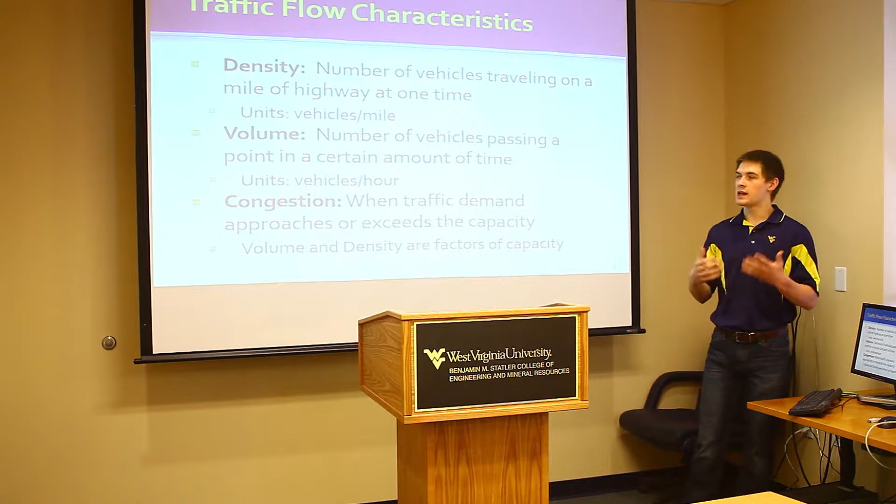And these two things are all because of the capacity. So what do you think controls the capacity? It is the volume and density, because a certain road can only hold a certain amount of vehicles per hour and per mile. So when that roadway starts to exceed or approach that capacity for the volume or density, that's when you're going to have a congested roadway.

So if you look at this picture right here, which lane do you think has the higher density and which lane do you think has the higher volume? So let's just assume that this lane over here on the left side is traveling near standstill speed, so not moving, and you can see that the cars are really close together. On this right side, the cars are traveling a lot faster and there's space between them.

So if we just took a snapshot of this picture, which one do you think has the higher density and the higher volume? So when we look at this, you can tell that this one has the higher density, because when we took our picture, you can count there's nearly 100 vehicles just in that one stretch of a mile.

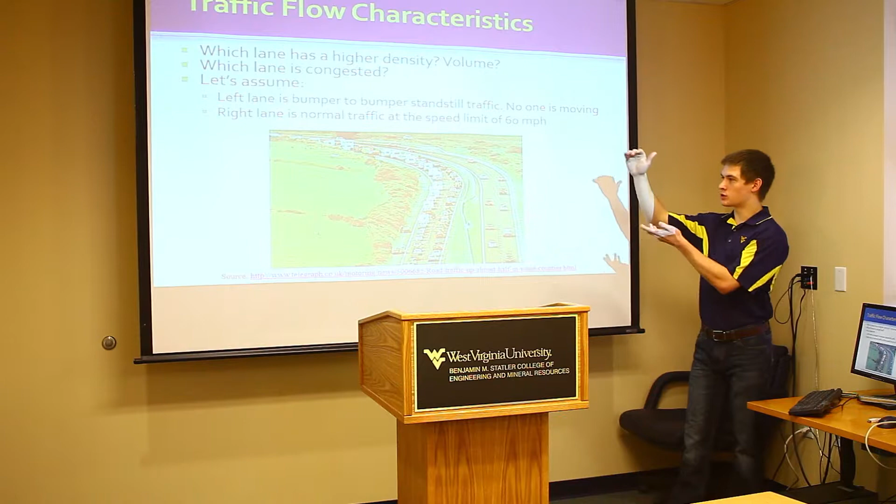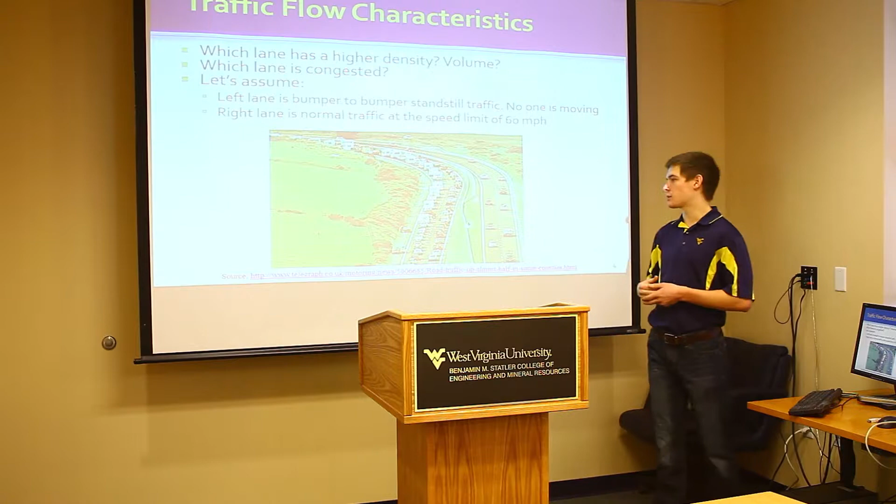On the other hand, this lane, the right side, has a higher volume because there's more cars traveling through in 1 hour. We can say probably 100 or 200 cars are traveling past this one point in only an hour. Whereas this lane, because there are so many cars but only traveling at a minimal speed, there's going to be very few cars passing, say, this point at a single given point in time.

So now we're going to talk about waves. Maybe something you've never thought of in the transportation sense, maybe more of going to the beach or going to a wave park. But we actually do have waves in transportation engineering, and it's basically caused by changes in volume and density in a roadway over time. So now when we look at this video, it's going to explain to us and show us a visual representation of how traffic waves are present in a traffic engineering situation.

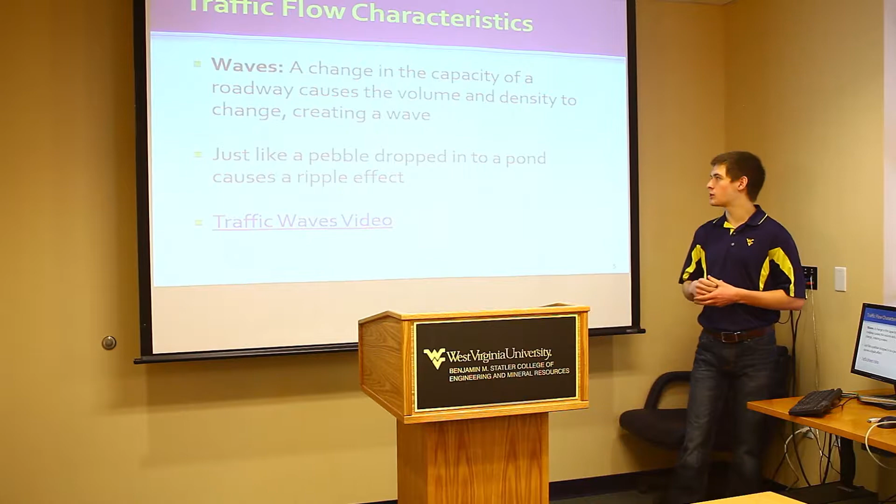You can imagine it's kind of like a pebble dropped into a pond. It causes a ripple effect. So when the volume and the density change, you're creating a wave. Here you can see there's a relationship between the speed and the density. And we call that the flow, because the flow is the volume over an hour of time. So it's kind of like the volume, how many cars are passing a specific point in an hour of time.

But you can see there's a linear relationship between the speed and the density. You can imagine when the speed is really low, you're going to have a really high density because the cars are bumper to bumper. When there's very high density, the speed is really low, and when the density is really low, the speed is really high. It's kind of like if you're driving down an empty interstate, you're going to be able to go the full speed limit because there's no one else there interacting with you, contributing to how fast you can or cannot go.

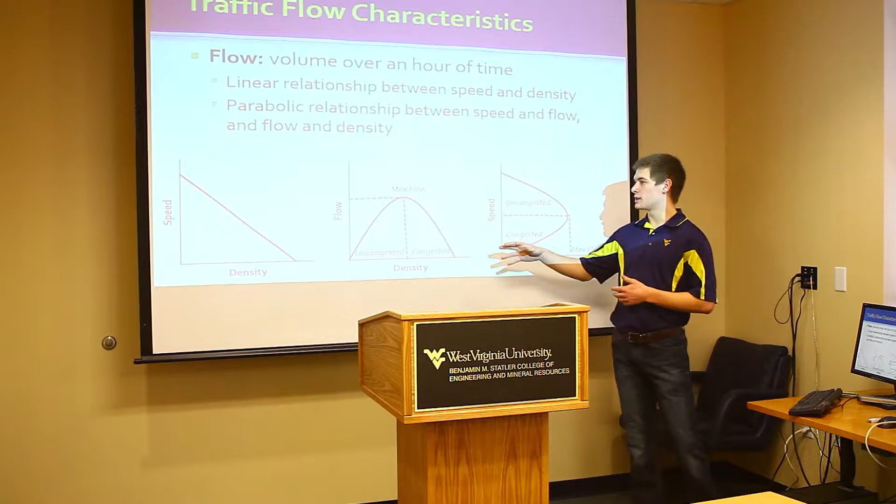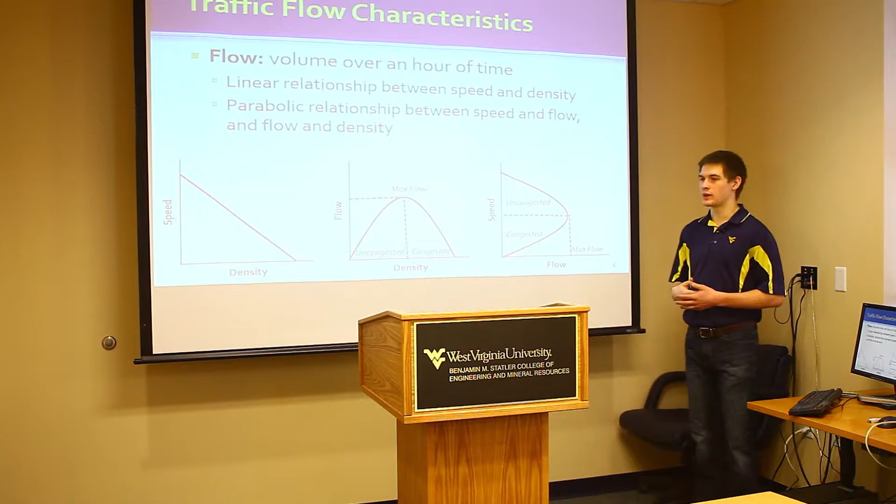And when we look at the relationship between density and flow and speed, you can see they make a parabolic curve. On one side of the parabola, you can see that flow is uncongested, or on the other side, it's a congested flow. Because once the density gets up to a certain point, or in this case, once the speed gets up to a certain point, then the flow starts to decrease instead of increase because the cars are getting too close, packed together, means they have to slow down. They can't go as fast as they would hope to do. So that's the end of the first section.

Now we're going to move on to signal analysis. This is more than just looking at red lights and green lights and deciding what are the three colors we're going to use and where are we going to put stoplights. There's a lot of engineering thought and management that goes into the establishment of these traffic lights. So first we have to know some different vocabulary about these. We're going to start with cycle, which is the time it takes so that every light on a single intersection gets the green light once.

Whereas the phase is a group of lights that have a green light at the same time. So if you're in a regular intersection, traffic usually flows opposite directions at the same time. So both of those lights would have a green light, which would constitute a single phase. We can also draw what we call phase diagrams to depict the different motions of traffic at a single time. So we can plan out who's going to have different turns at different times, and we can make sure that there's going to be no interferences so that people aren't turning left when other people are trying to go straight.

We also have two specific things specifically for left turns. We have a protected left turn and an unprotected left turn. So protected left turn means that there's no one that you have to look out for as you're turning left. If you can imagine when you come up to an intersection, when you have to turn left, you have to look for oncoming traffic. Well, if it's a protected left turn, you know that the oncoming traffic has a red light, so you don't need to wait for them or look for them.

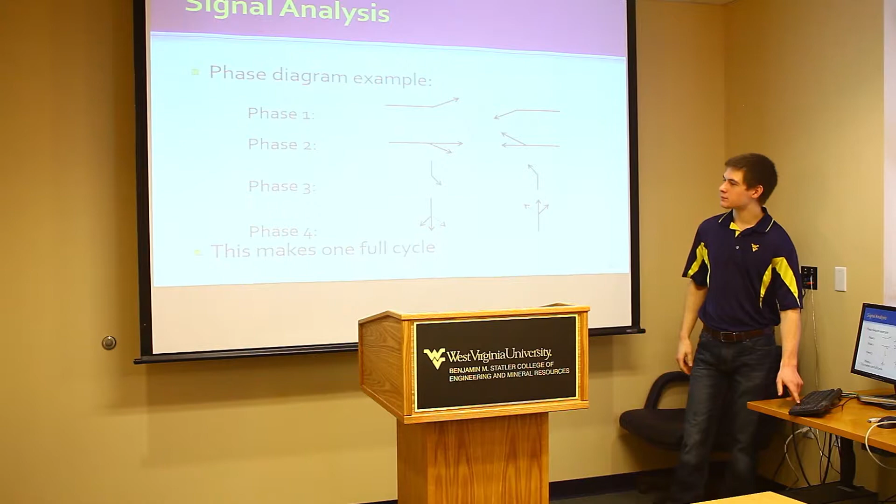So we also look at signal timing. How long does each light need to be green? How long does it need to be red? And while we're looking at that, we're trying to figure out how many cars are trying to use this intersection. How many of those cars are trying to turn left, go straight, turn right? We're looking at the demand for that intersection. So as you know, we have 3 different signal stages in every light. We have red, green, and amber. Amber is more commonly known as yellow. However, in transportation engineering, we refer to it as amber.

And all red time is when all the signals at an intersection are red. Why do you think we would use something like that when every single light is red for maybe a second or two? Really, that's so that we can make sure the intersection is clear before we make another light green, so that there's not going to be any added collisions. So for example, if you have cars coming through and their light turns red, if the light to go the other direction immediately turned green, if there was someone sneaking through at the last second, you could cause a collision. So instead, we err on the side of caution, add an extra second or two, so that every light is red, and then once the intersection is clear, the light can turn green again.

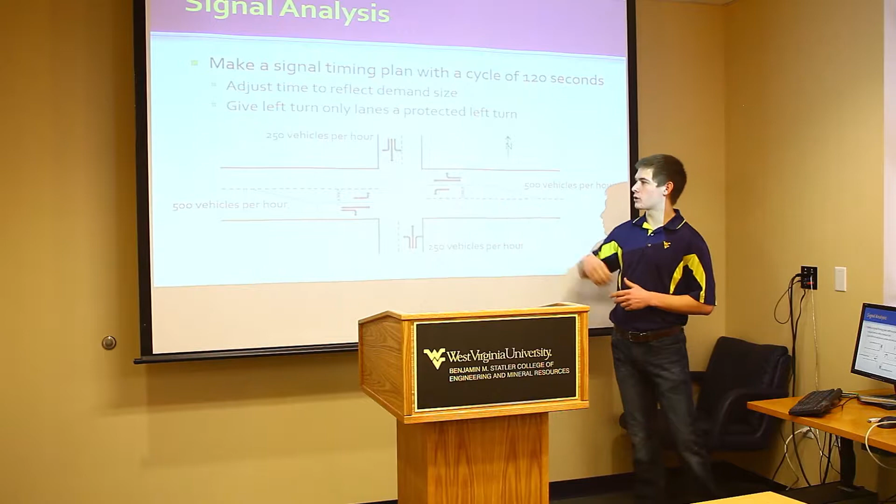So now let's look at this example of an intersection. You can see that this way, let's call this the east-west direction, has 2 lanes, one for a through and one for a left turn. And they have about 500 vehicles per hour, whereas the north-south direction has just 2 lanes, and each lane is used for every direction. So go ahead and take out a piece of paper and a pencil again and try to draw your own signal timing plan with a cycle of 120 seconds. So the maximum for your green time should probably be around 40 to 45 seconds. However, you can increase that if you want to give one direction more time than the other, because as you can see, this direction has more vehicles per hour.

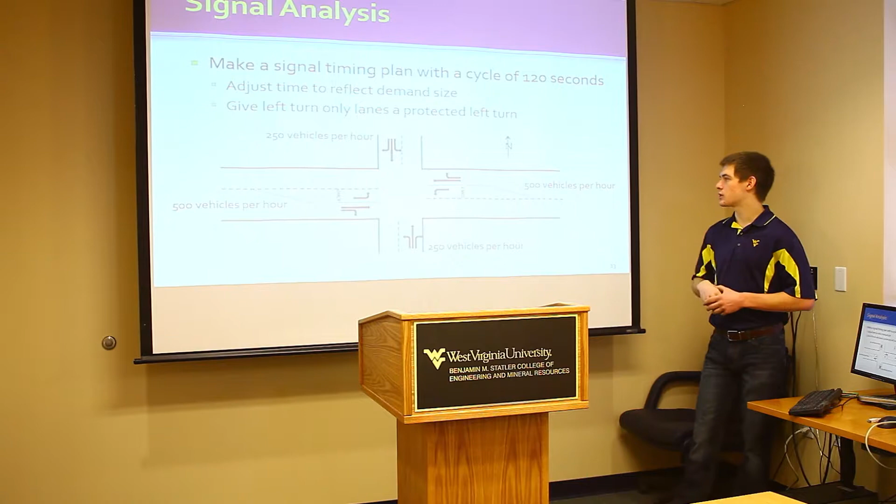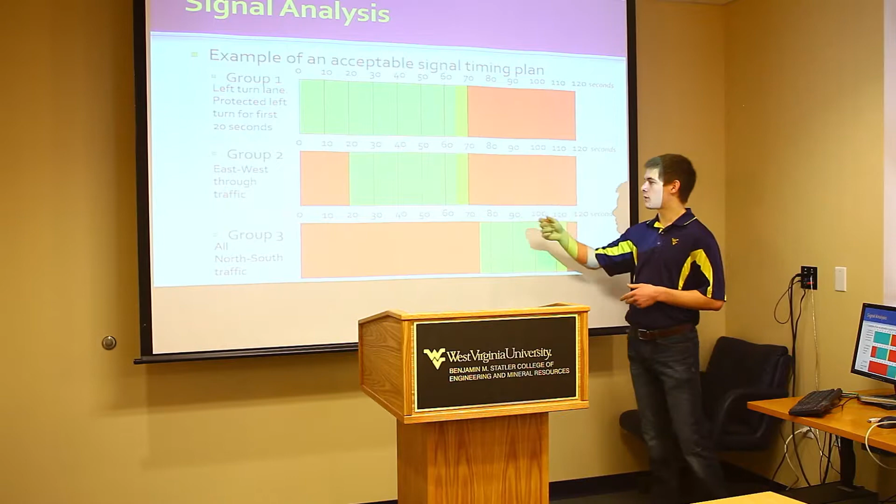We then have our amber phase, our all red phase, and then group 3, this is for the north-south traffic, so that they can get through too. And as you can notice, the east-west traffic has a longer green time. And as we noted earlier, that's because there's more traffic trying to come through in that time.

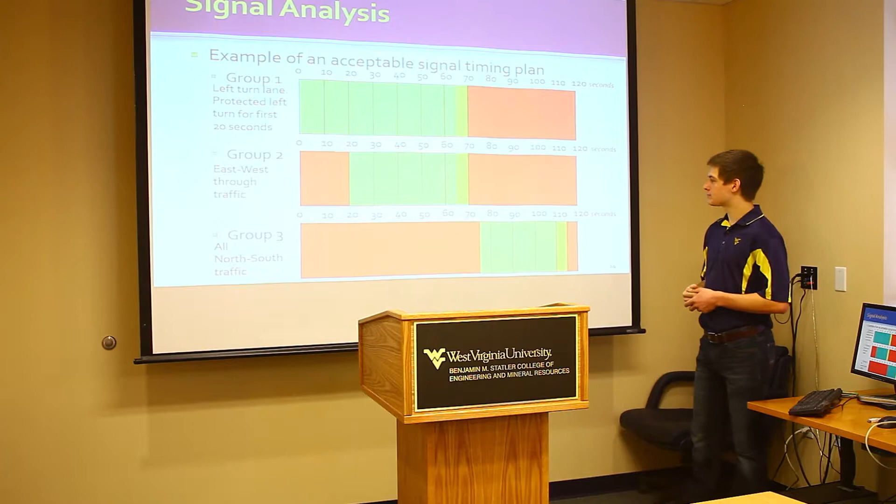So now we're going to talk about dilemma zones. Have you ever come to a traffic light, and you or your parent is driving, and the light turns yellow, or amber rather, and you have to make the decision whether you're going to go through the intersection or stop before the intersection? That's a split-second decision they have to make. Sometimes you can't make the perfect decision.

Sometimes you try to stop and you aren't able to stop in time, and you stop within the intersection. Sometimes you try to get through, but you can't get through in time before the light turns red. Thankfully, we have an all red phase, so you're not going to get into an accident most of the time. But this is something we call a dilemma zone, where you don't have enough time to get through the intersection and you don't have enough space to stop at the intersection.

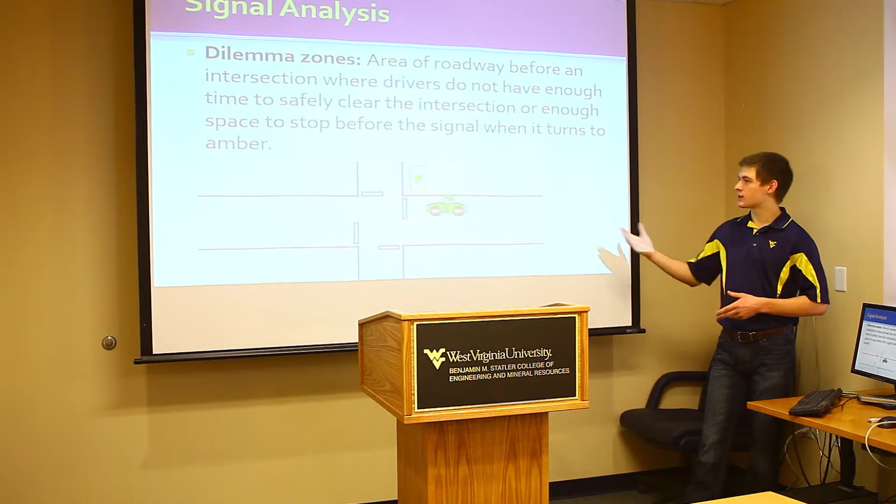As you can see through this lovely animation, this is what you should do. You should be able to stop right when you get to the stop line. So in the first case, you don't have enough space to stop. The light turns amber, you decide to stop, but when you try to stop, you end up stopping in the middle of the intersection because of physics. Your car can't stop in time or in enough space.

In the other case, you try to get through, but by the time you get through the intersection, the light's already red. So if someone was turning right or cutting through the intersection, you could get a ticket, you could get in an accident. So both of these situations aren't ideal.

So how do we decide whether someone's in a dilemma zone or not? First, we're going to look at the stopping distance. This is going to be calculated by taking the distance traveled during your decision, your time multiplied by your speed. And then we're going to add the distance for your car to stop. So for example, if you have a big truck, it's going to take a lot longer to stop, whereas if you have a small sports car, your car will most likely be able to stop sooner.

On the other hand, how long is it going to take your car to get through? You take the distance to the opposite side of the intersection and divide it by your speed. This is assuming that you're keeping the same speed and you're not going to try to speed through the intersection. So if the space needed to stop and the time to get through are greater than the available space and your amber time, then you're in the dilemma zone.

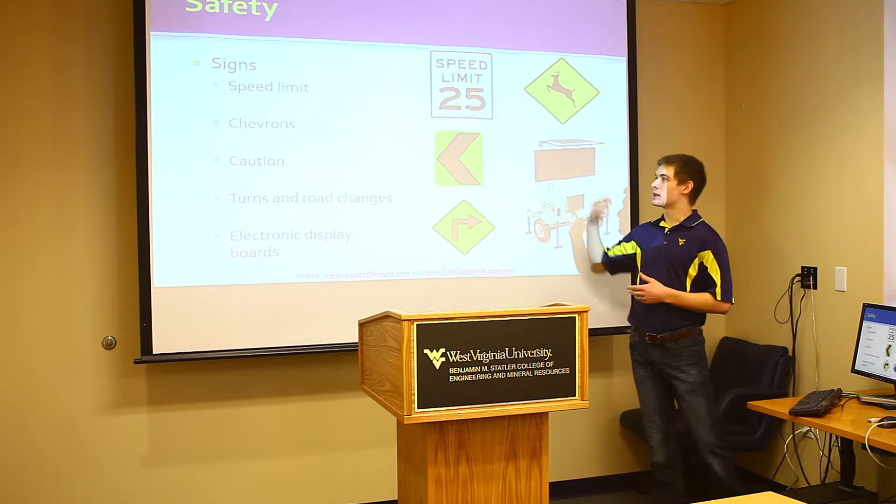So some things that we can implement for safety include signs. Many of you have probably seen speed limit signs, chevron signs, caution signs. They're all things trying to inform drivers and alert them to oncoming traffic, new dangers up ahead. We have caution for deer crossing, caution there's a tight right turn.

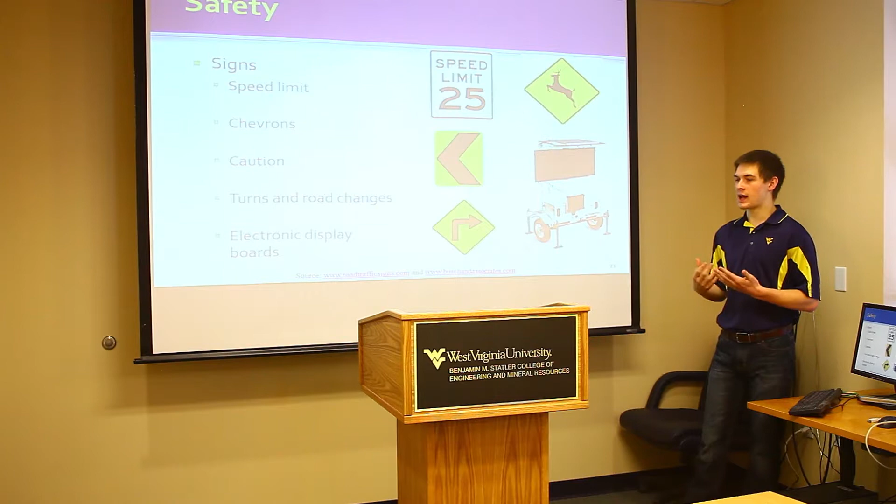We also have electronic display boards. You can probably see these on game days in university towns and big events, things like that, or if there's construction going on. So we can use these signs to inform the driver so they can make the best decisions and they don't have to be alarmed if they come across something.

So that's a big plus for safety, is adding lighting. It's also a lot easier to navigate, especially in rural areas where it's curvy roads and your headlights can't bend around the corner.

Something else you might have seen is rumble strips. That's where we take little bits of the road out on the side or the shoulder of the road, so that if a driver would fall asleep or become distracted and they start to go off the end of the road, the rumble strips, once they hit the tires, are going to make a loud noise and a vibration, so it would wake the driver up or alert them that they're coming off the road.

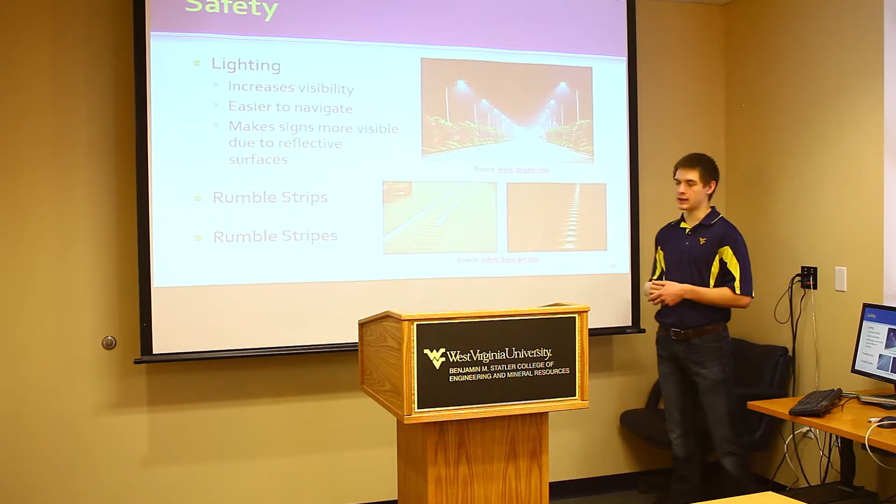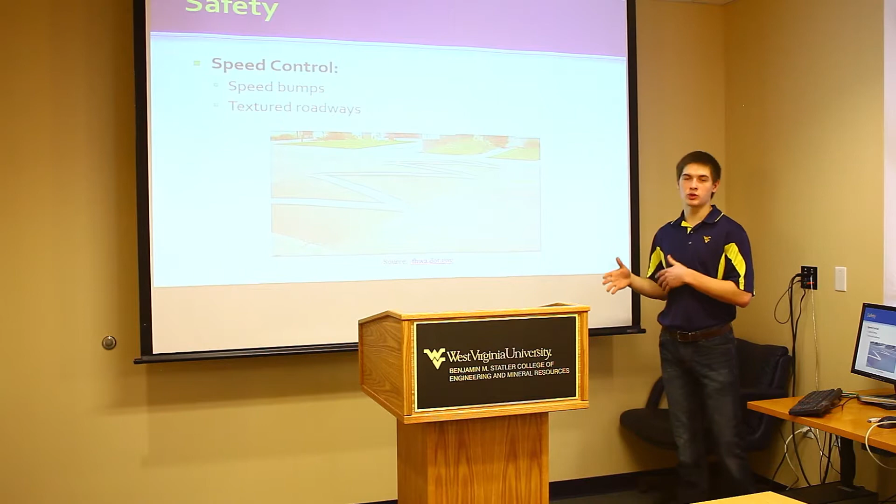We're also going to talk about speed control, something you might see in small neighborhoods, mall parking lots. We use things like speed bumps, where if the car's going too fast, it'll make an aggressive bump. Most of the time, it'll alert drivers to keep them slow so that they can keep going at a regular pace. We also use textured roadways, which is pretty much like taking a rumble strip and creating it across the entire road.

So if someone fell asleep when they're driving down this country road, they're not going to go off the road, hit a telephone pole, and ruin their car, have to be sent to the hospital, something of that nature. Instead, they have 4, 5, 6 feet of space that if they come off the road, they can have enough time to control their car and get it back on the road with a lot of safety in mind.

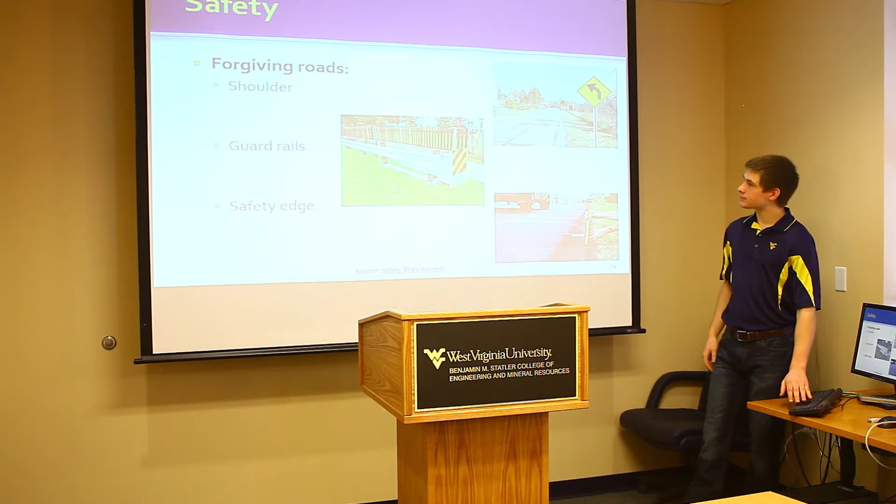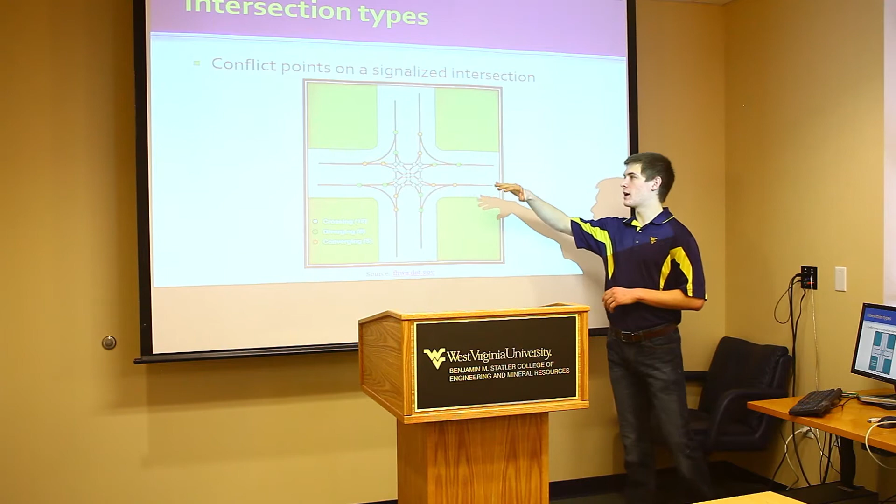Our last topic is intersection types. First, we're just going to look at a conflict point diagram where we're going to trace the different routes of every vehicle traveling through this intersection. And then we're going to color code every time that the lines either cross, diverge, or converge. These show different conflict points, so places that people can get in accidents.

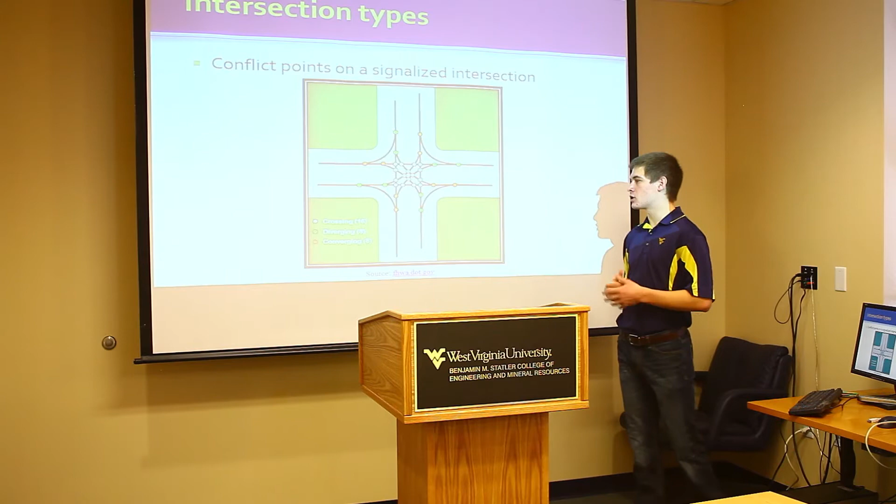For example, a crossing point is where you would have a T-bone collision or a head-on collision, something of that nature. Diverging and converging, however, would more be like side swipes, bumper-to-bumper collisions, things of that nature. So, as you can see, this is just a regular 4-way stop or a 4-way signalized intersection, and it has a lot of conflict points, 32 to be exact.

So what we try to do as engineers is try to decrease the amount of conflict points. So we're going to design different types of intersections so that we can decrease this amount of conflict points. One of the more up and coming and more widely used nowadays is a method of intersection called a roundabout. Basically, every car entering this intersection has the same opportunity to use the intersection. There's no stop signs, no one has higher priority going one direction than the other, and there's no stoplights.

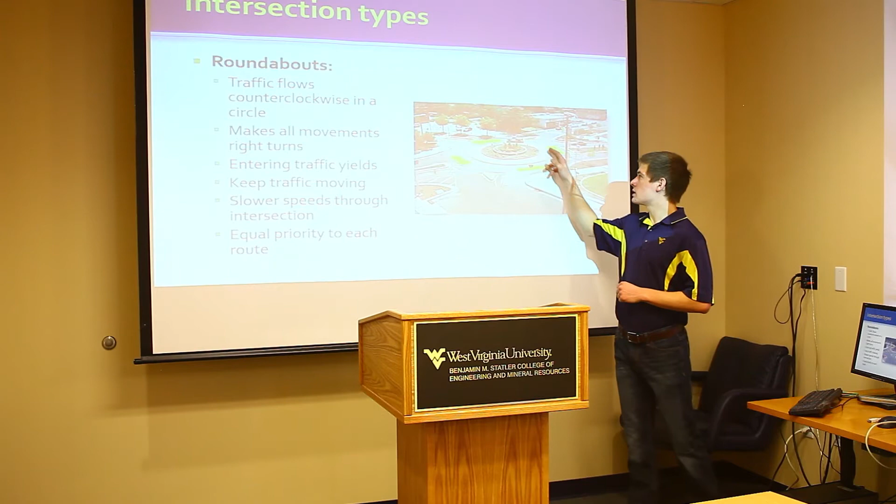So when you approach the roundabout, there's a yield sign. You must yield to anyone that's in the roundabout already, which consists of this circular area. And everyone has to move in the counterclockwise direction, so to the right. Once you enter the roundabout, you basically proceed until you get to your exit. So if you wanted to go straight in this intersection, you would enter here, wait for the roundabout to be clear, proceed around, and then exit whenever you get to your exit or to your leg of the roundabout. So this turns all the movements into right turns.

The entering traffic is yielding, it keeps traffic moving, and it slows people down because you can't go around this tight circle at 50 miles per hour. You're going to have to reduce your speed to probably half that, 25 miles per hour. So once you approach it, you slow down. It makes a much safer environment.

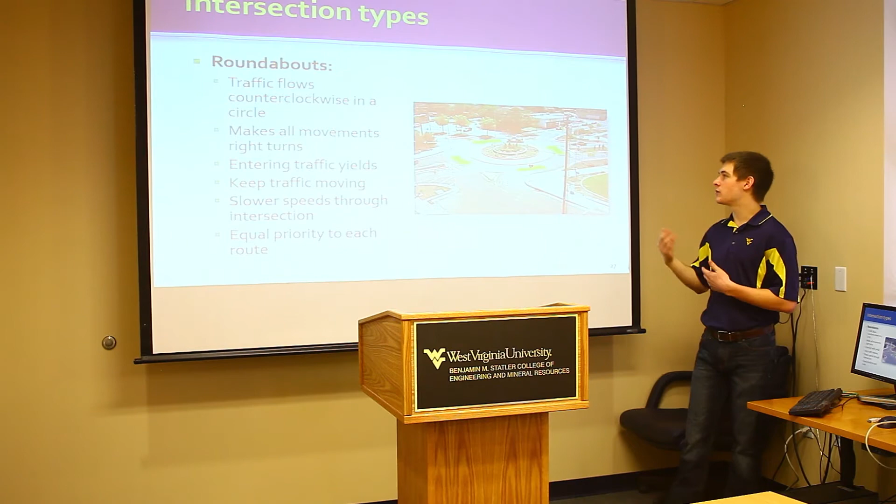As you can see here, there's some pedestrian crossings around the outside of the intersection. If this was a signalized intersection, you wouldn't feel as safe as a pedestrian to cross a road if the speed limit's 50 miles per hour, per se. But in this case, because the traffic is alert and slowing down to enter the roundabout, you feel safer to be able to cross the road.

So let's go ahead and take out your pencil and paper again and try and draw a conflict point diagram for a roundabout. And then we're going to compare that to the conflict point diagram of just a regular intersection.

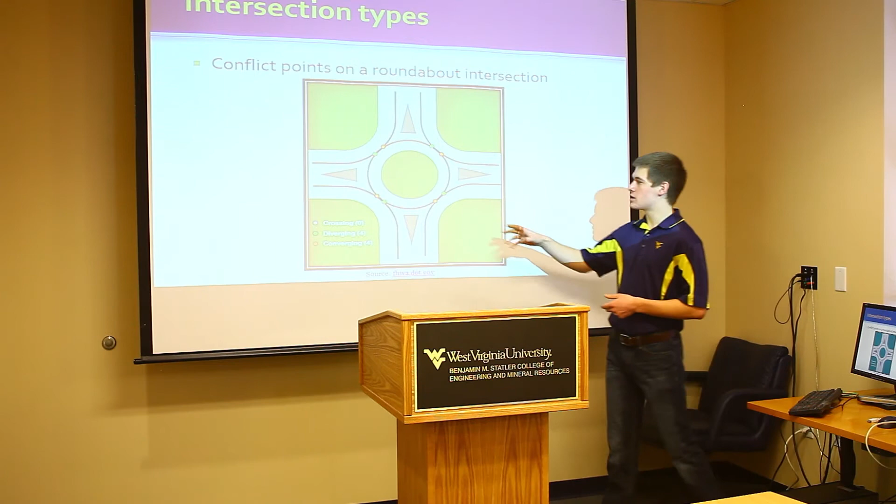So as you can see here, all the conflict points that were crossing have been deleted. There's no crossing points. And all the diverging and converging points have been reduced by half. And you can see here that they're a lot smaller. The angles of attack are a lot smaller.

So if you had an accident in a roundabout, most likely it'd be a small fender bender or a sideswipe, something that's not going to cause as much damage to your car or to the people riding in your vehicle as a T-bone or a head-on collision would. So that's what makes these roundabouts so effective and so much more safe, is that they slow down the traffic and they reduce the amount of conflict points.

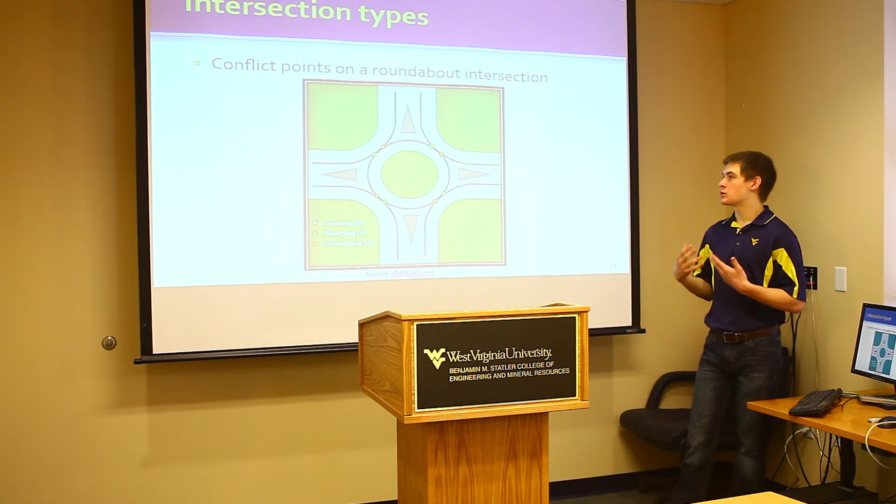And as you can see here, everyone is going in a circle so you can see all the traffic moving together. So it makes everyone more aware of what's going on. Some new types of intersections that we're looking at as engineers to implement are the diverging diamond, the single point intersection, and the jug handle, also known as a Michigan left turn.

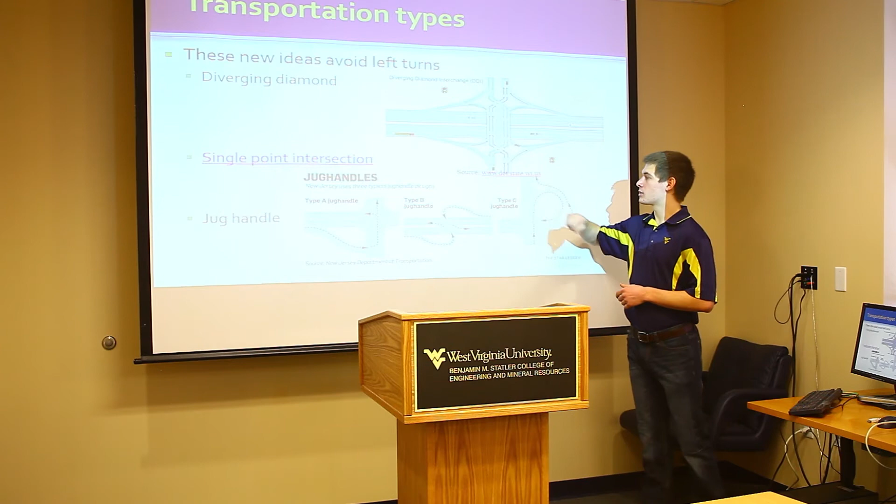So as you can see in this diverging diamond, it basically gets rid of left turns. So this is in the case of trying to get on an interstate. You would have an on-ramp on this side and an exit ramp on the other side. And once that occurs, you would have lanes cross. So what was the north-south direction on the right side is now going to be on the left side. So it's almost like now you're driving in Great Britain on the bridge.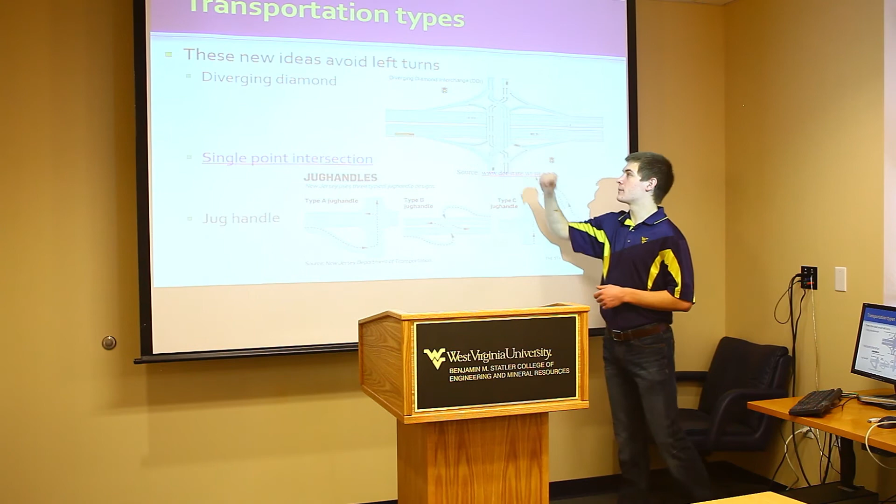Then, once you get to the other side, there's a merging lane to get on the interstate. Once that occurs, then you can switch back over to the right side. So, like roundabouts, this can kind of be confusing for people who haven't done it before. But once you have done it and it's been in your town or your city for a long time, it becomes a very useful way and a very safe way of traveling because it gets rid of those left turns.

When you have a left turn, you're having to cross 2 or 3 lanes of traffic that are going the opposite direction at high speeds. So this decreases that, and some results and tests have shown in the past when they've used it in states like Missouri and Kansas that it actually creates a safer environment for exiting and entering an interstate.

To see the single point intersection, you can click on this link here, or basically what it is, it takes the intersection just like this, where you're getting on and off the interstate, and combines it to one signalized intersection in the middle of the bridge. So instead of cars coming off, having a stoplight, having to cross the bridge, and having another stoplight, they would all merge to one stoplight.

That can reduce the traffic because you have one less light, and now everyone's coming together, and there'll be a lot less left turns too, a lot more through traffic. The jug handle, again, is eliminating left turns. As you can see here, if you're trying to make a left turn in this case, you would have to come off the interstate or the road, make almost a U-turn to go straight through the intersection.

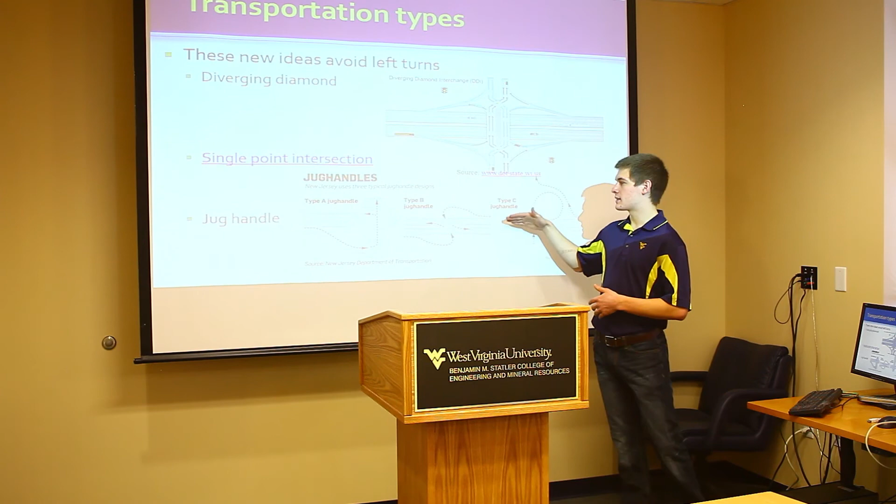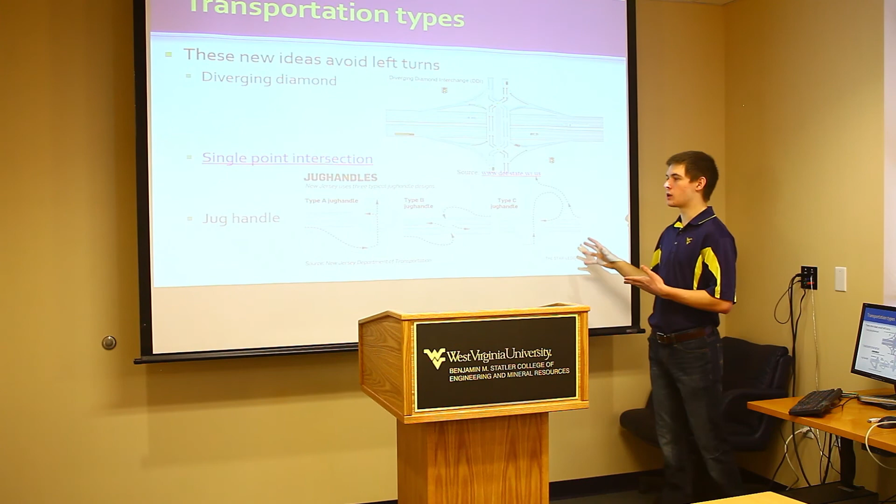In this case, you would have to exit and then cross at a different point, most likely a signalized intersection specifically for people trying to make a left turn. So these are used a lot in states like New Jersey and Michigan for avoiding left turns, and they've also proved successful in the past for creating safe environments.

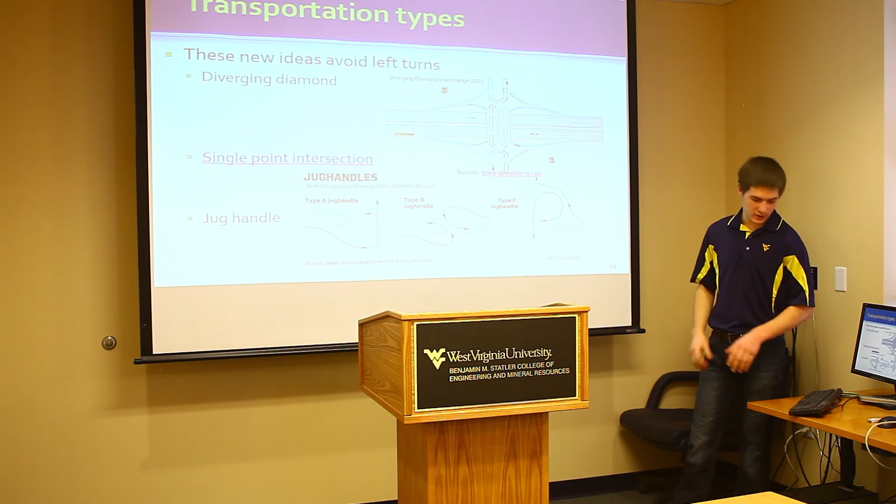So just to review, today we talked about traffic flow characteristics, what makes up transportation, and how the different vehicles interact. So that was density, volume, congestion, and waves. And we also talked about the signal analysis, the cycle, phase diagrams, and dilemma zones, how we're going to control signalized intersections, how we're going to adjust if one direction has more traffic than the other.

And we also talked about safety. How can we as engineers create a safer environment for people on a driving surface? Can we add signs, lighting, rumble strips and stripes, speed control, and in the end we're trying to make forgiving roads so that if there is an accident or some mistakes are made, you're not going to have critical consequences.

And finally, we talked about different intersection types. What do we do to consider one intersection type better than the other? We use conflict points. We also talked about roundabouts, diverging diamonds, single point intersections, and jug handles, trying to eliminate left turns, trying to create a safer environment for drivers as they proceed through an intersection.